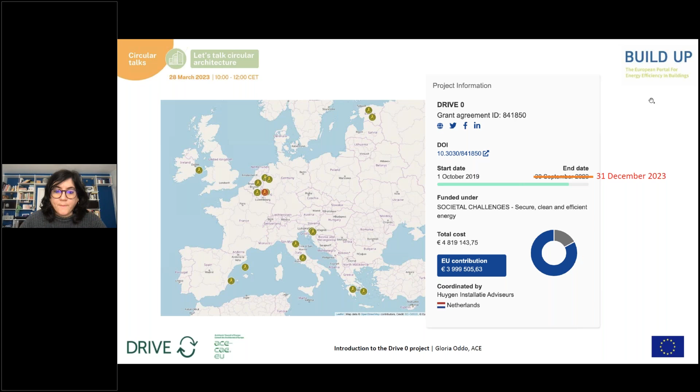The pilot countries of the Drive Zero project are 7, and we're going to see them later on. So the important thing is that for each country, there is at least one research partner, meaning a university or research institute, and at least one technical partner dealing with the technology innovation aspects.

Besides those 7 countries, we have also Belgium, because 3 umbrella organizations are based there, although we represent the interest of our members at European scale. So the umbrella organizations are us, the Architects Council of Europe, representing architects, UIPI representing property owners, and Housing Europe representing social housing providers.

Why is a circular approach needed in architecture? Well, first of all, buildings are responsible for 40% of the total energy consumption in Europe. So it's quite a lot considering all the other sectors that are also energy consuming.

60% of the energy used throughout the life cycle of the building is the so-called embodied energy, meaning it's the hidden energy needed to manufacture an object or a building. So from the mining of material, considering also the manufacturing and the transportation to the construction site. Then we have the life cycle of the building, and then demolition or hopefully reconstruction. So this is all the embodied energy.

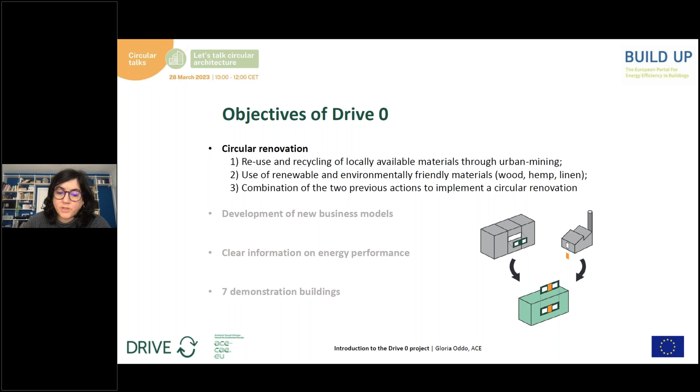Development of new business models - this we're going to see later on more in detail with my colleague, Professor Elettra Agliardi from the University of Bologna.

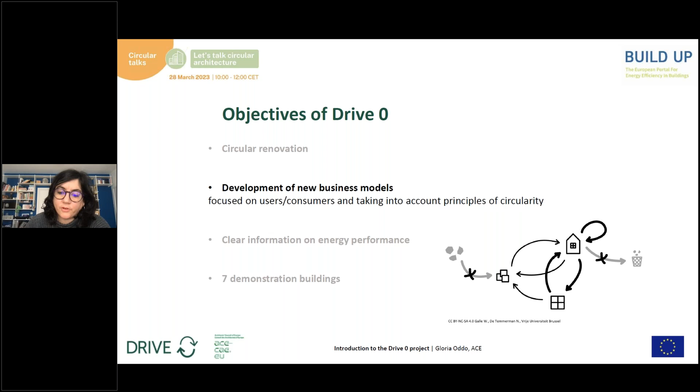Clear information on energy performance, because once the circular renovation has taken place, then of course we need to transmit this information to the users, to the occupants of the building themselves.

And then, of course, the buildings are also an objective of the project, and so they are all located in the 7 pilot countries of Drive Zero: Estonia, Greece, Ireland, Italy, the Netherlands, Slovenia, and Spain.

This is what the buildings look like before the renovation. As a consortium, we tried to pick buildings that represent a frequent typology in their own country. This was meant also to ensure replicability of the technologies and of the research that has been conducted in Drive Zero.

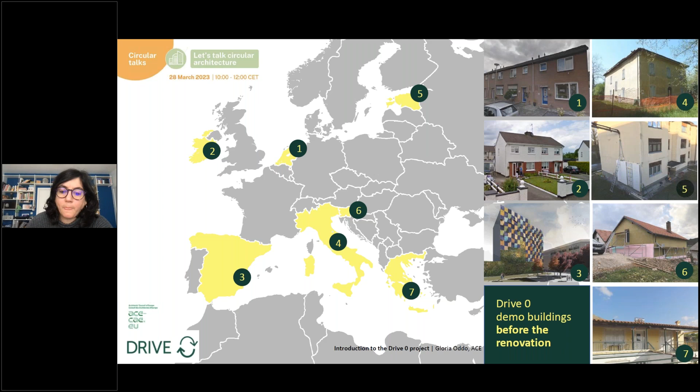Today's focus will be on Ireland, which is number 2, and Italy. Spoiler alert: this is how it looks already after the renovation. My colleagues will explain to you in more detail the renovation process.

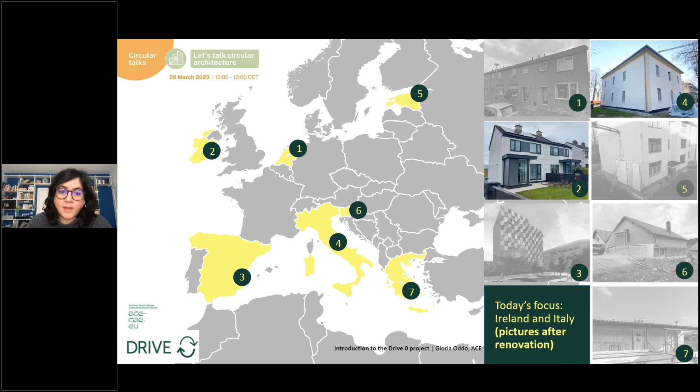What about the other demos? They will be presenting in the next webinars. As Julia said, this is the first of three webinars. The next one will be co-organized by University of Bologna and Housing Europe, addressed to social housing providers, though everyone is welcome to join. We're going to present the Dutch and the Estonian buildings.

More information will be available soon, but you can check our website on Drive Zero. The third and last webinar of this series is co-organized by University of Bologna again, and the Property Owners Association. This will be on the 27th of April, where we're going to present the Spanish, Slovenian, and Greek demonstration buildings.

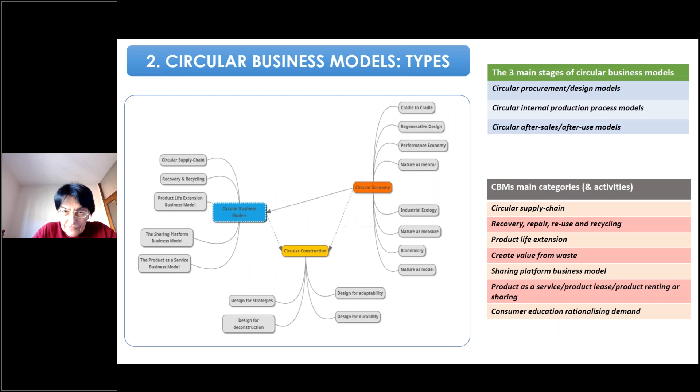As I just said, once we focus in particular on product and service, in terms of eco-design for customers, we always have to bear in mind that we need to implement environmentally friendly solutions.

You have to avoid planned obsolescence by design. So here you have these concepts which would be developed also in the next presentation: design for disassembly, modularity, and industrialized manufacturing.

At the same time, you have to think in the design phase of ways to facilitate repair during use, facilitating product upgrades and updates, facilitating recycling after use. So here you have to focus on the end of life recovery as well. But at the same time, we have to move also to different ways of considering, from the point of view of consumers, the financing aspect and therefore the payment aspect.

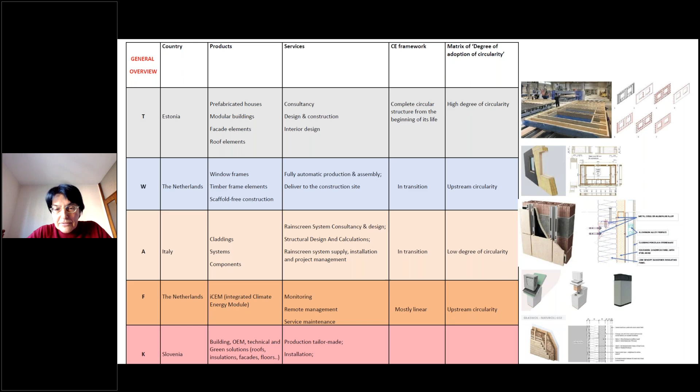Here you have an idea of the type of products delivered by these companies. To conclude this preliminary part, the main takeaways relevant for most of the audience, architects or consultants in the eco-design process, is this: you have to become aware in the design phase and develop solutions that take into account how to introduce circular inputs, circular product service systems, and exploit other important elements of circularity like lifetime extension and sharing platforms. Also consider products where value recovery is important, how to reuse waste, and how to build new solutions in terms of shared ownership, considering use aspects rather than ownership.

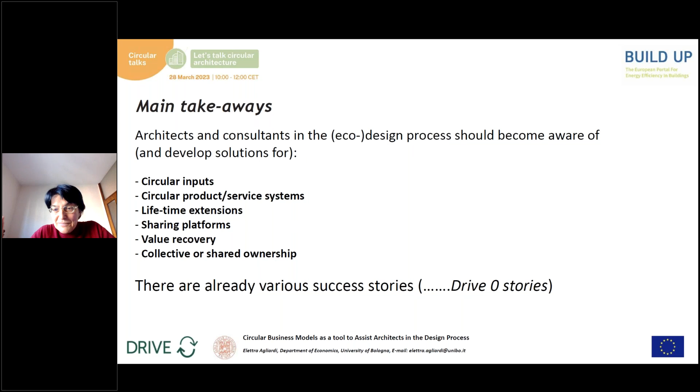There are already various success stories, and of course we have successful stories also within Drive Zero. The Drive Zero successful stories will come immediately after my presentation. Thank you for your attention.

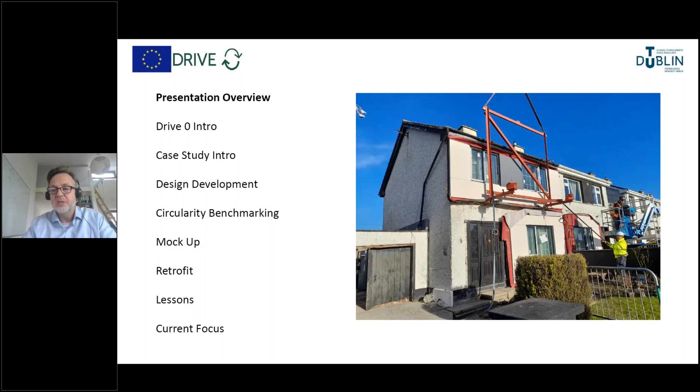I'll quickly skip through the Drive Zero intro since you've already been introduced to the project. I'll talk about the Irish case study, the design development, how circularity was benchmarked, the mock-up phase where we did preliminary testing of the circular wall panels, and then go through the actual retrofit phase, finishing with a discussion of lessons learned from the project.

As you know, Drive Zero is an EU project looking at exploring circularity through modularized solutions as a core aspect. We are one of 7 consortium partners, the Irish partner on the western fringe of Europe.

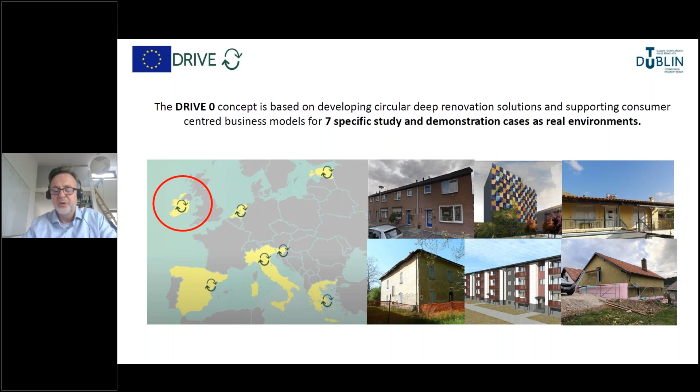Our case study is in the center of Ireland. It's a 1970s construction, typical of what we call a semi-detached house, 3 bedrooms, in social housing owned by the local authority, or what you might call a municipality in Central Europe.

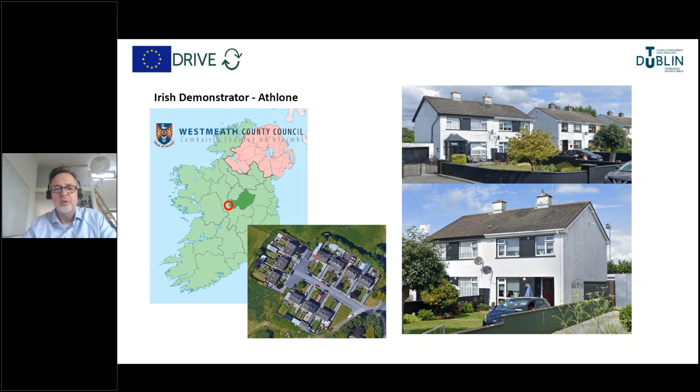So this is the demonstrator. This is our energy rating method, and when originally constructed in the 1970s, it would have rated as a G, the lowest rating. It would have been heated with a solid fuel range cooker and an open fire, and was uninsulated.

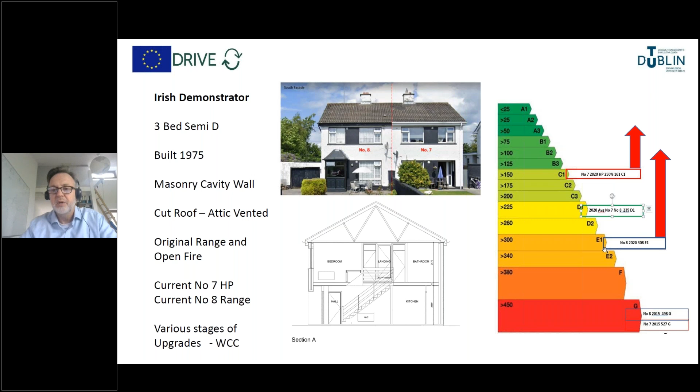In the interim between the 1970s and now, before we started, there were some interventions. One property rated at an E1, with double glazing installed and some insulation in the attic. Another property rated at a C1, which had similar upgrades plus a modern heat pump fitted. So the houses were already partially retrofit, and we attempted to achieve a combined 65% improvement for both properties.

The measures we undertook were a fabric upgrade, including the modularized system and a small extension. We input new heating systems, new energy efficient ventilation systems, renewable energy through photovoltaics, and new windows and doors. All of that combined gave us a 65% uplift.

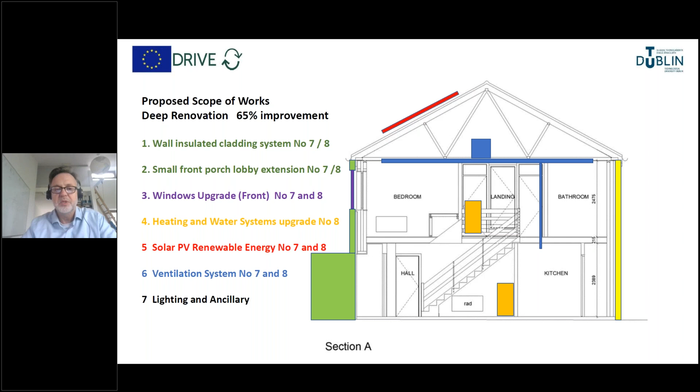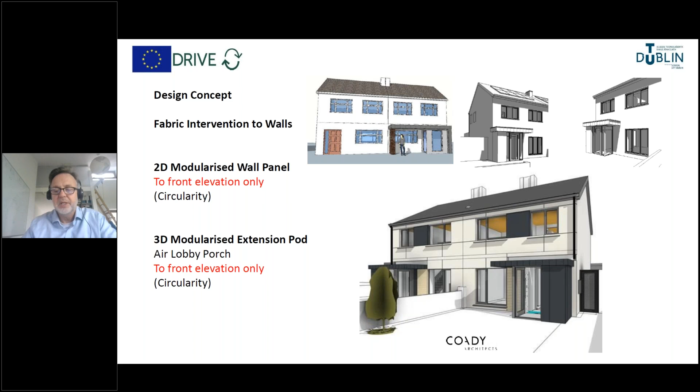Design concepts really focused on how we would retrofit the facade, the wall facade. Due to the scale of the project and budget, we didn't feel it was feasible to do the roof, which had already been partially upgraded. So the main intervention in the demonstration project was the modularized wall construction and the modularized circular extension pod.

So our partner was a conventional light gauge steel manufacturer. They had a system being used in construction in Ireland, and we looked at how we could adapt this system to become a wall cladding and modularized extension system, transitioning some of the plastic insulations to bio-based insulations, and looking at how we would connect and assemble the panels to the wall. These are some very early concept proposals and an initial concept build-up for the panel.

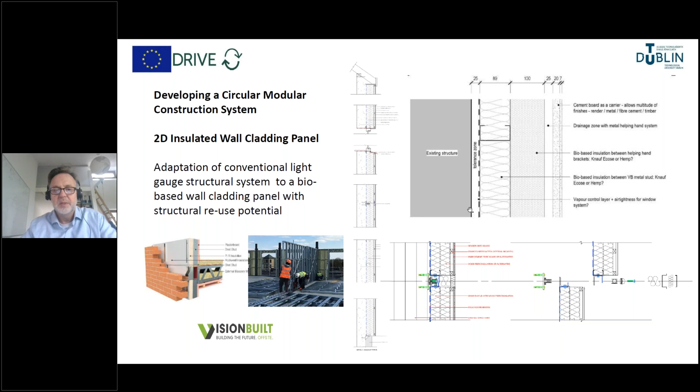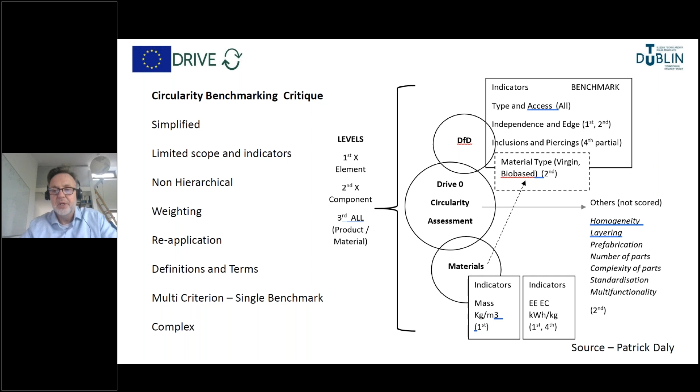There were a number of circularity assessments done during the project, which were quite insightful and helped us develop the strategy. We also developed some criticisms of the simplification of that method, particularly that it wasn't always undertaken at different levels in the hierarchy. But it really helped us develop our thinking about what circularity was, and in particular how important design for disassembly and material specification are to achieving circularity at construction level.

Out of that, we focused on this strategy to attempt full disassembly at all three levels in the building construction hierarchy. At level 1, we wanted to ensure the prefabricated panels could be detached from the host walls in their entirety, so they could be reused in another cladding or structural context because they had structural capability, or transported to a facility to be disassembled in a structured environment.

At level 2, we wanted to ensure the main components that made up the system - the wall panel, the window system, and the jointing panels or jointing sections - could all disconnect from each other and be reutilized with minimal impact. Then at level 3, we wanted the panel system to be fully disassembled from all components and products and materials down to their base elements.

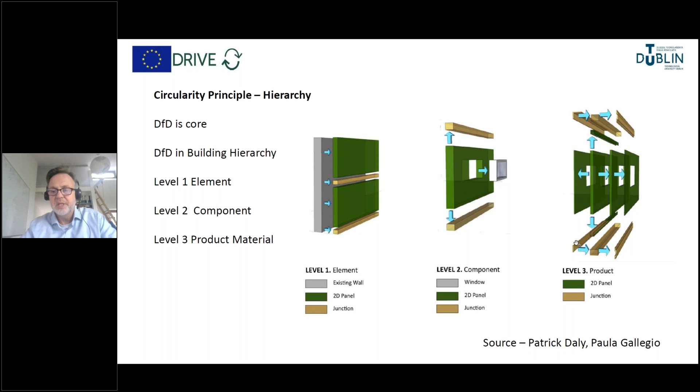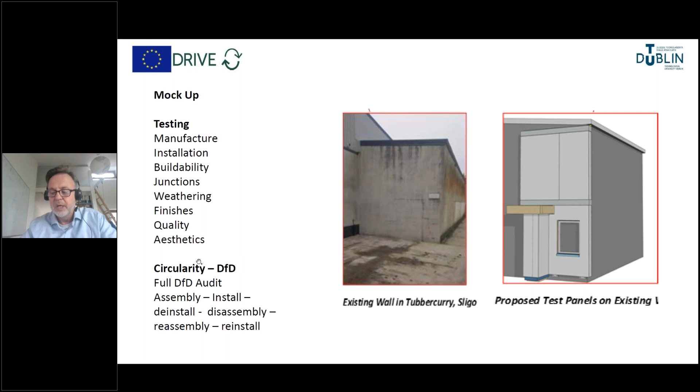Based on that strategy, we tried to implement that concept in a mock-up, and this is the mock-up design. It was partly testing architectural and technical factors, but we also undertook a full design for disassembly audit - not only installing the panels, but taking some down and disaggregating them, then reassembling and reinstalling them. We went through the entire disassembly and reassembly process in the mock-up.

The design of the mock-up was based on trying to make sure we were covering all the types of junctions we may encounter in the retrofit, and quite advanced technical details were done on our first attempt.

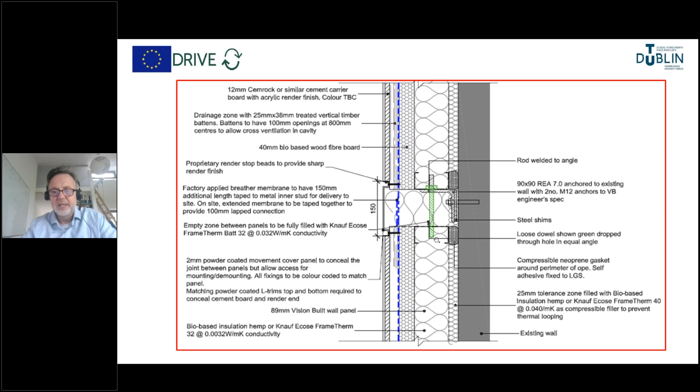Central to that was the concept of having an access zone that we could get into and access a simplified fixing method, so the panels could be lifted up and off their brackets. The panels technically have no direct fixings - they're held in place by gravity and restrained anchorage. This was to allow a very simple and rapid install, but also to facilitate a simple and rapid deinstallation. So that was a key detail.

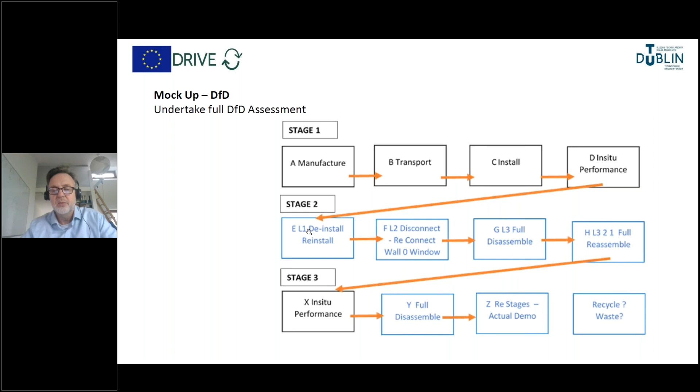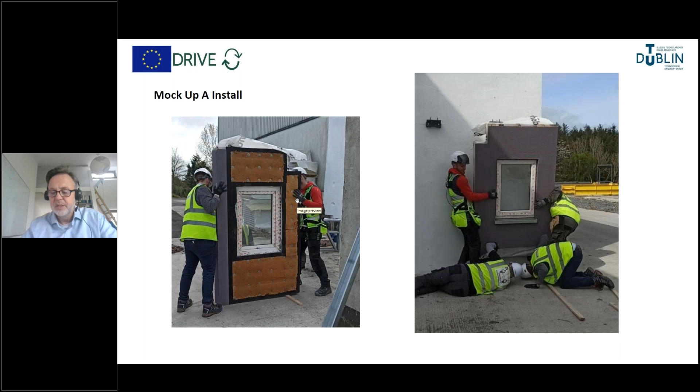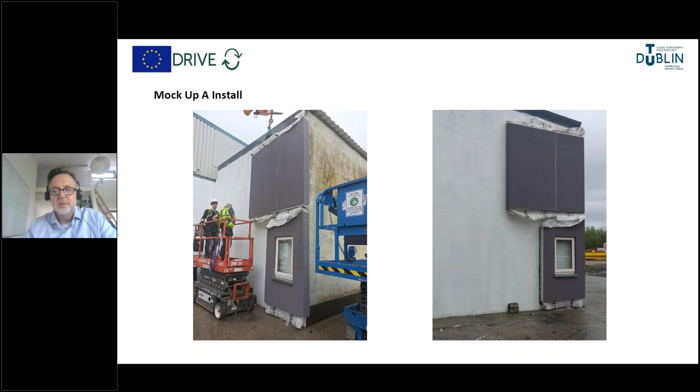So there's the panels being manufactured, and there's the bracketry being prepared, and then the panels going in place with a backing concept, which we then modified. The backing detail was to take into account undulations in the existing wall construction, and the three panels going in, and then we had the roof and wall panel for the pod to go in.

There were significant learnings from that, and the main one was that we needed more tolerance in the bracketry system to facilitate easier install, but also more accurate jointing and alignment of panels. We were also critical of the render system we were using and really saw the need to move to a completely dry system. The backing solution was also not working effectively, so we modified those.

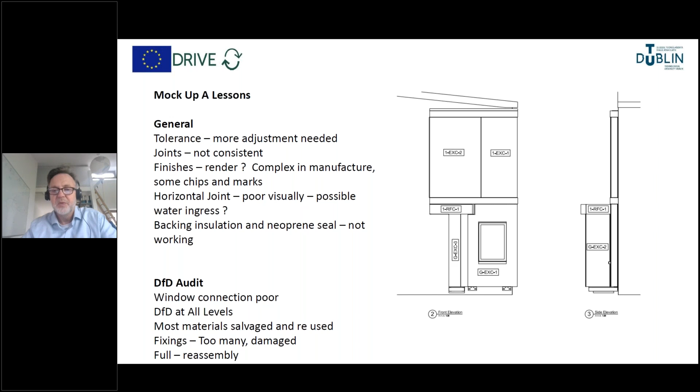We then began to take some of those panels down and undertake our full design for disassembly audit. We disassembled and remanufactured some of the components. A significant change was redesigning the bracketry, drawing from our colleagues in Estonia who had done a similar bracket system in the More Connect project. We introduced that concept to give us more tolerance in the design, and we changed to a full dry system.

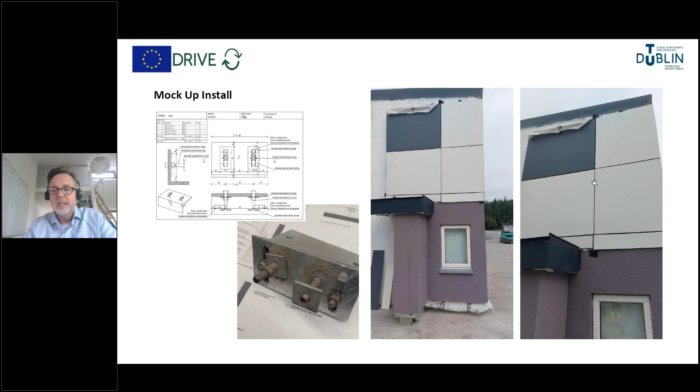Here you can see the roofing panel and the wall panels for the extension pod being mocked up. Even from this, there were some improvements to be made with how we were going to make the jointing more weather tight, but that was the fundamental change.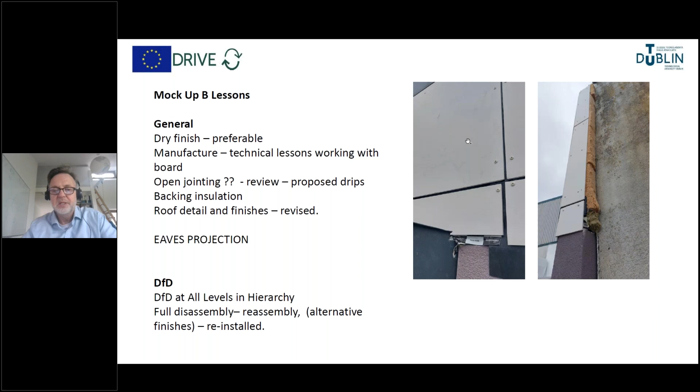From that, we did some further adaptations and a third installation to look at the process of installing a larger panel system. The mock-up was quite an essential process, and there was huge learning from that. We then began to apply that in the final design.

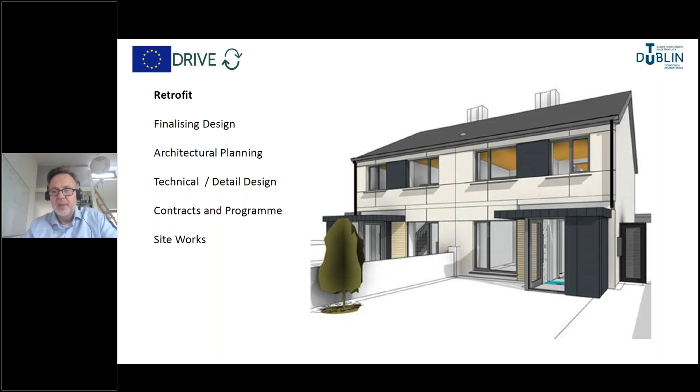The final design was developing the architectural design with a change in materials and discussing issues around planning. This was one of the concepts developed for that discussion. We also advanced the technical and detailed design with specification and detailing changes made from the mock-up, developing building contracts and program, then moving into site works.

We have some examples here from the final architectural drawings from the design, and then we move to site works. I'm going to go through the enabling works and then focus on the upgrade of the facade on the modular system.

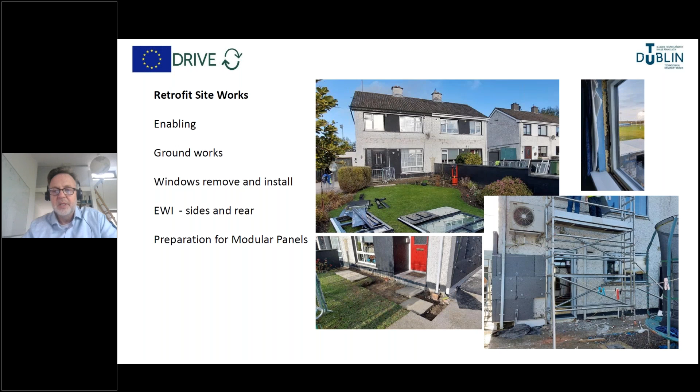Firstly, we have some enabling works. The modularized facade has only been applied to the front of the properties, while the rest of the building is being wrapped in external wall insulation. Here the building is being prepared as the windows are being removed from the rear, and the bracketry is going in for the panels.

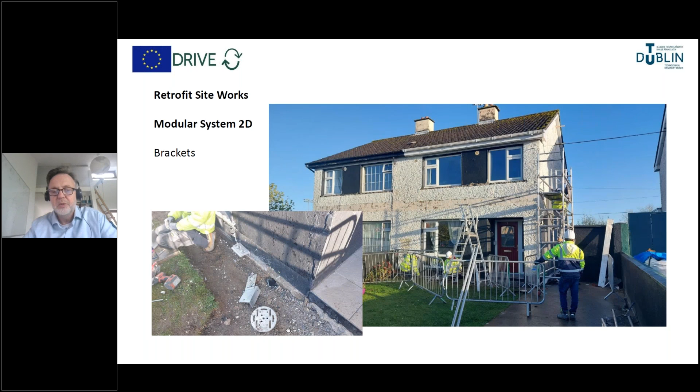We have some ground screws going in to take the extension so that we could avoid concrete foundations. There's the brackets now being lined up and installed.

Then we have the delivery of the first panels and the crane, with part of the road having to be blocked off to facilitate the delivery and the craneage.

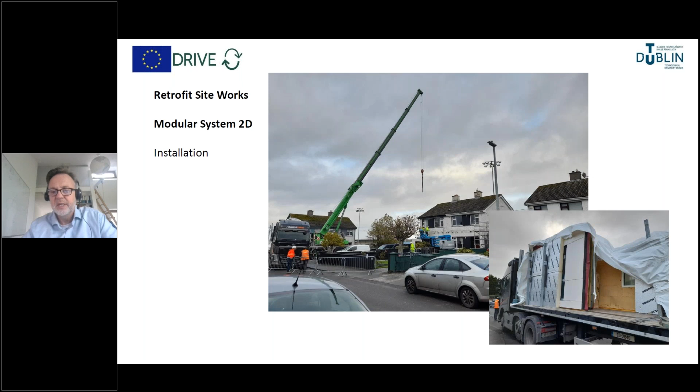There's the first panel being lifted off and dropped onto the brackets, being leveled up and going into place. You can see it being dropped in, and the brackets on the right show how it sits onto them. It's then restrained from the top bracket, with a clip put in to restrain it in place.

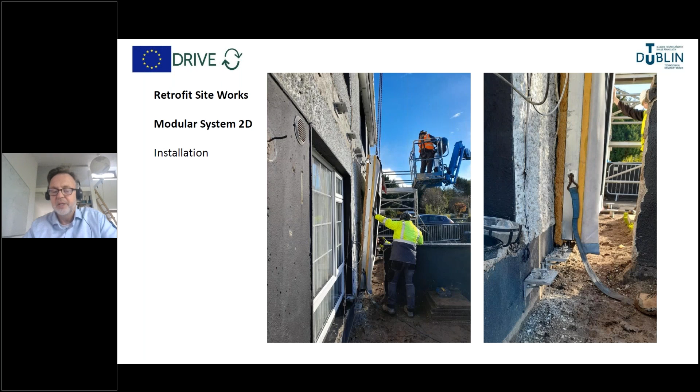That's the first panel installed, sitting on the adjustable brackets. You can see the brackets can go up and down and can go in the horizontal plane in and out to give some tolerance.

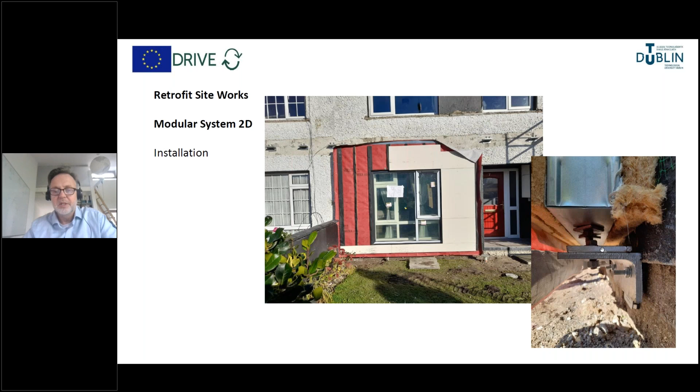Second panel going in, fully finished, windows installed. Upper panels going in — these had to go in under an eaves projection, so a counterbalance system was designed so they could be put in vertically and get in under the projection.

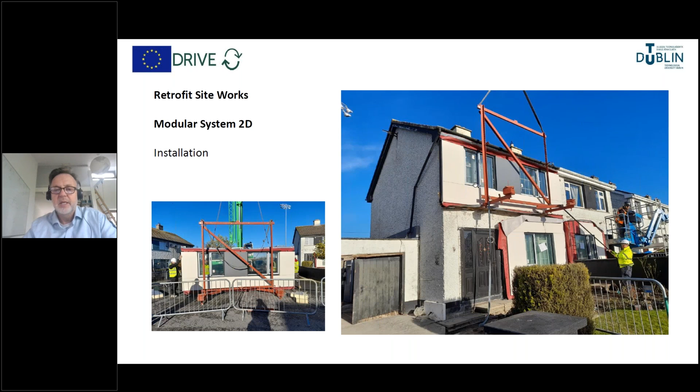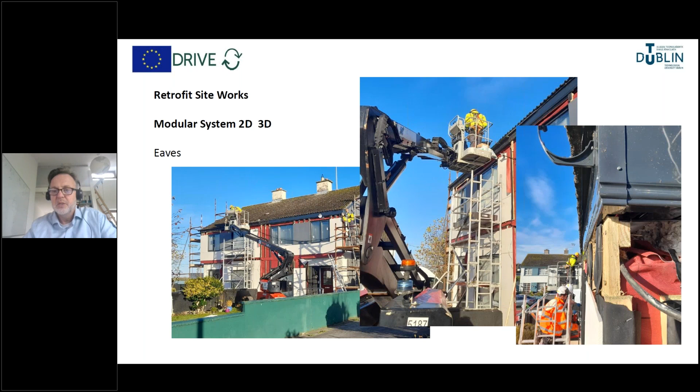Then we are doing some modifications to the eaves to get ventilation into the roof, because the panels were affecting the original airflow into the roof.

Then the internal windows are removed, showing the new external windows already in place, and they need to be lined out, insulated and made airtight.

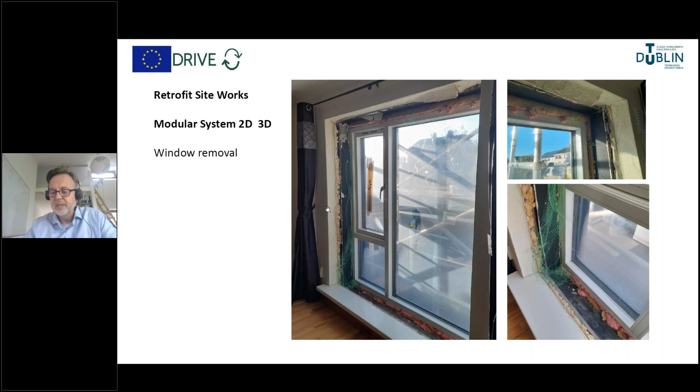Then the porch floor is going on top of the ground screws, with the wall panels going in for that.

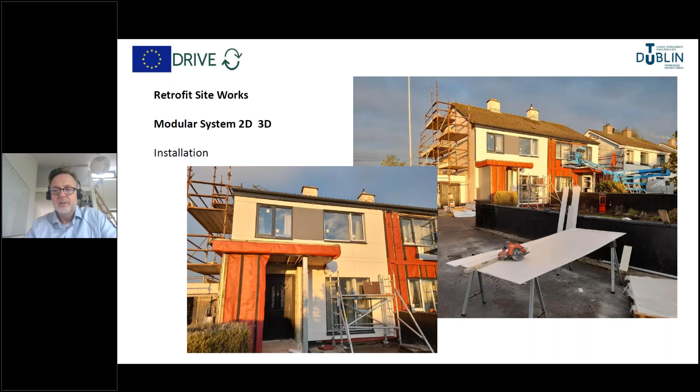Walls and roof going in on the extension, the roofing finish on the extension, and wrapping the external modularized system detailed to meet the external wall insulation system. Then the porch glazing comes with doors and glazing for the extension and internal finishing.

Of course, all that's happening on the outside, but there was reasonable impact internally, particularly as all the windows and doors had to be relined. So there was impact in every room, and there was some disturbance to the tenants.

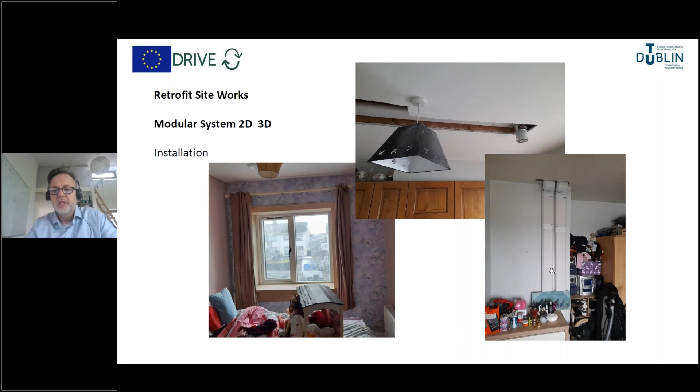We were also installing new ventilation systems, and those routes needed to be worked within the existing fabric. That meant some interference in a number of rooms, which was a challenge for the tenants.

Then we're coming to finish out the modular system, and the external render system is being finished as well.

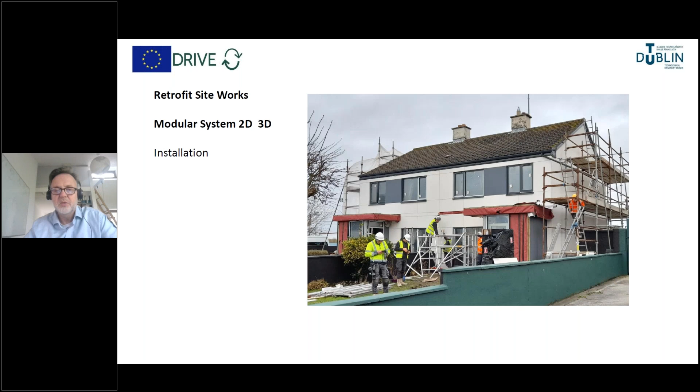We're coming toward completion then with the PV system being installed. Then we come to completion just a few weeks ago, with all the groundworks being finished outside and the roofing being finished on the modularized system.

The main lessons learned were in relation to the retrofit works. Obviously, it was quite unique because it was a research project, so the team involved was quite large and complex for such a small project. I think that had communication problems, because you would not normally have such a large team involved in a small retrofit project. We were surprised with the amount of impact on the tenants.

Although we had a lot of external plug and play modularized solutions, there were still significant impacts on the tenants who were in situ and living in the properties during the works. That was particularly access to the property because of the porch extension, all the windows having to be lined out, so every room that had windows and doors had some work and tradesmen. The scaffold for the external wall insulation caused access issues to the rear of the buildings, and some of the services installations meant electrical cabling and vents and ductwork being installed, which also had impacts.

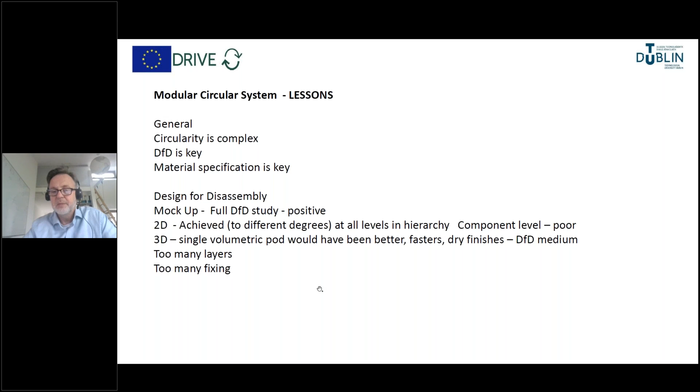Going forward then, we would feel that for the Drive Zero project, we probably needed a more comprehensive and diverse partner team at the beginning. So we would look to do it again with a wider team base, and a more significant budget and a more advanced circularity system assessment method.

Going forward, we would love to be involved in follow-on research on circularity, particularly in design for disassembly and modularity. We see that there's huge opportunity for developing modularized circular solutions for the upgrade of facades and building envelopes. We would like to be involved and see the need for a larger scale demonstration project where we can see some of the financial benefits of scale and more holistic whole building upgrade rather than just partial, both domestic and commercial. We would think that we would need contractors and specialist suppliers engaged in the project from the start, because it's also about a circular process, and circularity needs to be in the whole supply chain.

So there are some of the overarching lessons that we've drawn out from the project. Thank you very much, and hope that's been informative.

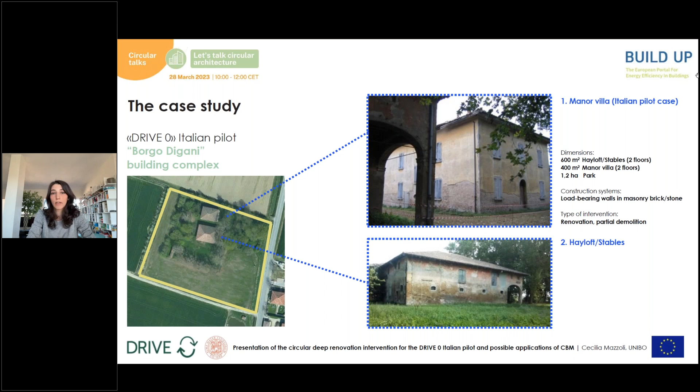In 2021, when the private foundation decided to intervene in the building complex, it was very compromised and damaged in terms of seismic safety, architectural and conservative quality, and also energy and mechanical performances. So the manor villa is constituted of a load-bearing masonry structure in solid bricks, and we can say that it represents a very typical rural residence, commonly widespread in different rural contexts of Southern Europe and Italy.

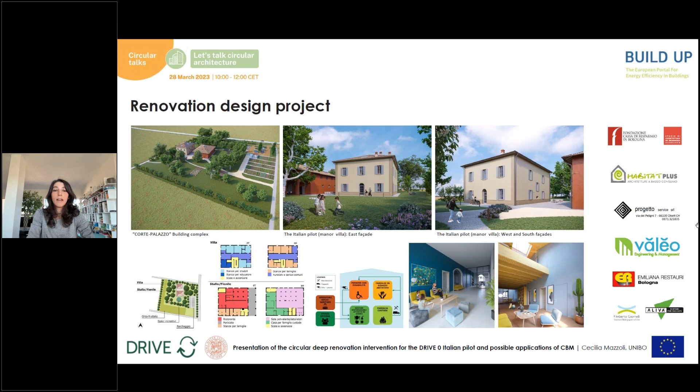At the end of the renovation process, the municipality of Argelato will dispose of a renovated building complex in which the manor villa will be transformed into a multi-user social residence for disadvantaged and disabled people, and the former barn stable will host social services for residents and citizens, surrounded by a beautiful park of great landscape value.

The buildings are not subjected to an architectural constraint, but just to a historical documentary constraint. So the regulations in force in Italy do not allow deep intervention in the facades, but just on the roof. On the facades and other architectural elements, it is only possible to softly intervene. However, it is always mandatory to realize interventions that preserve the typological construction character of the buildings as a testimony documentary building.

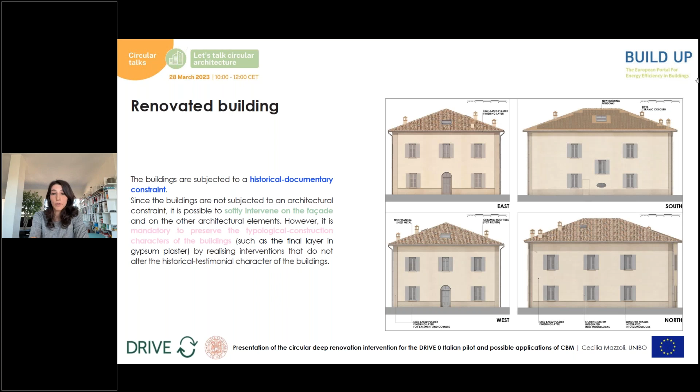This issue represents a very important boundary condition to be considered for the design of all the renovation processes to be developed. The construction began in July 2021, and the end of the works is scheduled for mid-2023.

In these slides, we can see the specific circular actions implemented. First of all, we have the reuse of existing materials, such as 92% of the original roof ceramic tiles on the new roof, and also the reuse of crushed original solid bricks for paving substrates. Then we have the installation of building integrated photovoltaics panels integrated in the south-oriented pitch of the roof, and the energy refurbishment of facades.

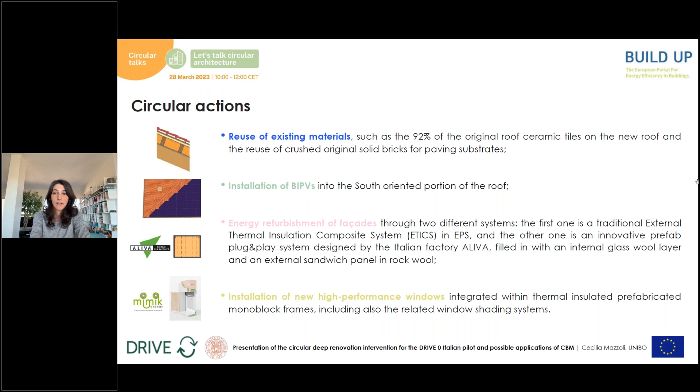That is one of the main important interventions, through two different systems, one traditional and the other more innovative, designed by the Italian factory Aliva, which is partner of the Drive Zero consortium. And last but not least, the installation of new high-performance windows integrated within thermal insulated prefabricated monoblock frames, which also include the related window shading system. So these are basically the most important actions.

Regarding the refurbishment of the building envelope, here we can see the two different systems adopted. For the south and east-oriented facades, we used a traditional external thermal insulation composite system called ETICS in EPS. This was implemented, fixed and glued to the existing facade for a total thickness of 20 centimeters.

On the north and west-oriented facades, an innovative technology designed by Aliva has been implemented. It consists of plug-and-play prefab panels filled in with an internal glass wool layer and an external sandwich panel in rock wool, for a total thickness of 20 centimeters, equal to that of the ETICS used for the other facades. The implementation of two different solutions allowing the same value of thermal transmittance according to the legislation in force is aimed at testing the technical feasibility and energy performance of the two solutions.

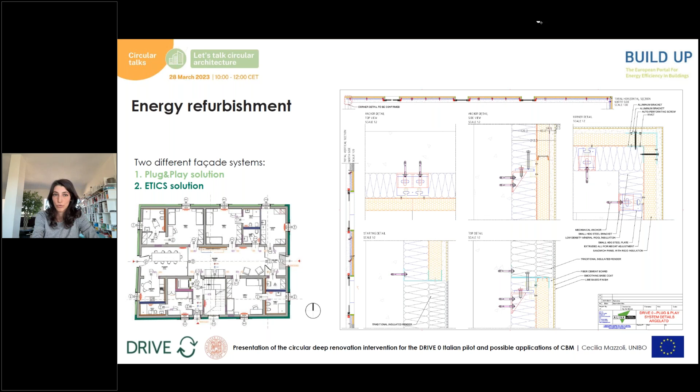Here we can see the specific materials and products used for the plug-and-play solution. For the external finishing, we used a fiber cement board that was used as a waterproof layer and as a base for the finishing layer in lime plaster, imposed by the historical constraint.

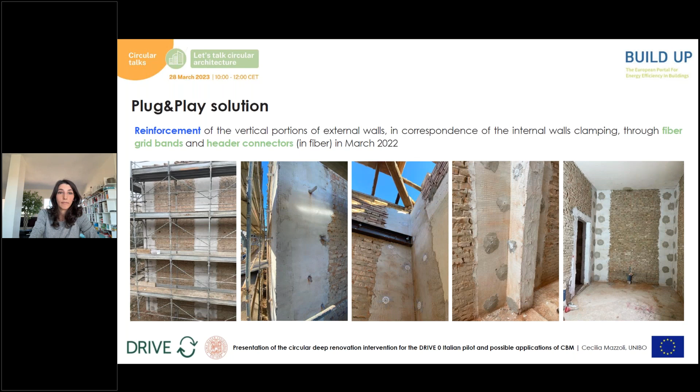Here we can see some pictures of the deep structural reinforcement of the external load-bearing walls through the use of fiber grid bands and header connectors. And here, after the masonry reinforcement, we see the installation of metal anchors for the implementation of the prefab components.

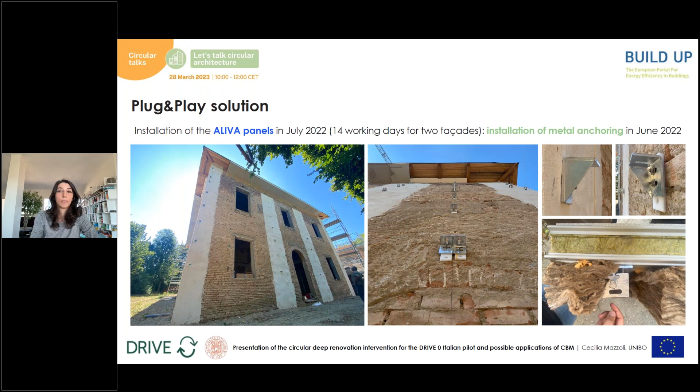Then we had the implementation of these large format panels designed and produced by Aliva, which is completely innovative in the field of protected heritage. So this was the most important challenge for our pilot demonstrators. The installation took 14 working days for the two facades, so we can say that it has been proven to be a very fast assembly system.

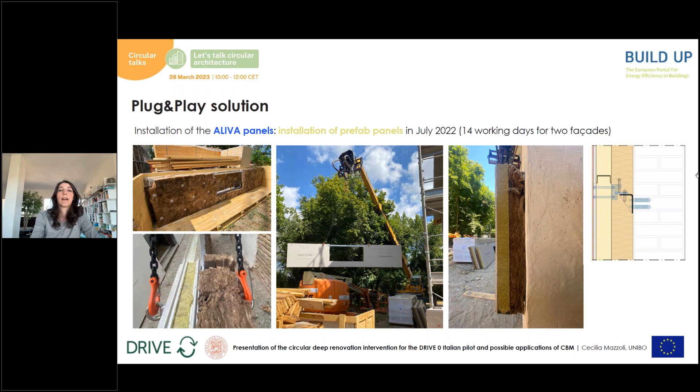In correspondence of windows, the prefab monoblocks were positioned and fixed through the use of punctual anchors in steel. Then the voids have been filled with EPS in order to solve the thermal bridge.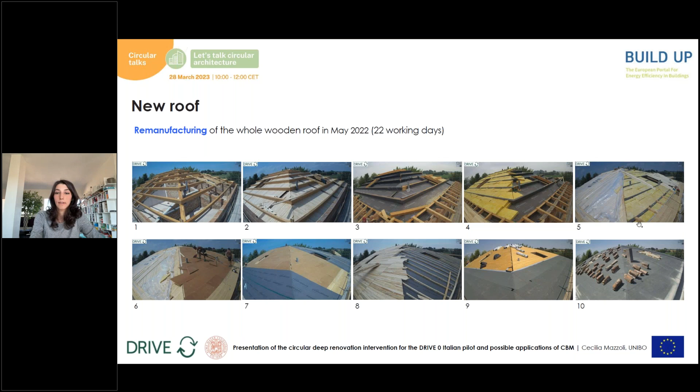And then in particular, we can see the two specific circular actions implemented for it, related to the reuse of the original ceramic roof tiles, 92%, and the installation of building integrated photovoltaics panels in the south-oriented pitch of the roof.

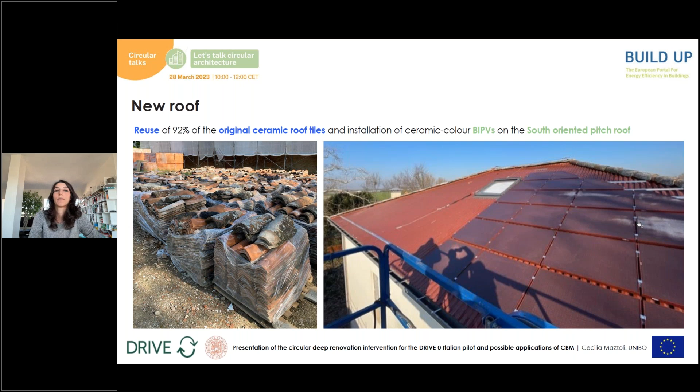Regarding the analysis, Unibo conducted several analyses of the circularity level of the intervention for the 4 different facade solutions. We considered the plug and play and the ETICS solutions in the demo version, the ones physically adopted in the demonstrators, and then we studied also the corresponding solutions in the original version.

That was more circular finally. The analysis considered different values related to different factors: basically the embodied energy and embodied carbon values, the circularity indicators such as design for disassembly, materials origin, and the reusability of products and components used in the different solutions, and also the percentage of waste and reusable materials at the end of life.

Among the 2 plug-and-play solutions, the original one, including metallic substructure and anchors and a cladding in recyclable ceramic tiles, seems to be more circular than the other one imposed by the historical documentary constraint with its non-recyclable original lime plaster finishing layer.

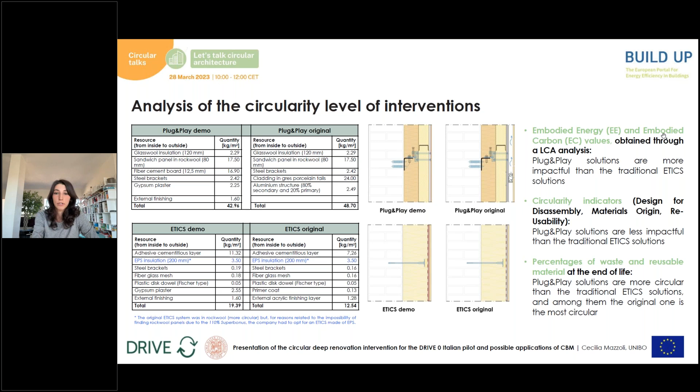Referring to the business model circularity, as shown during the presentation of my colleague Professor Agliardi, we can see in particular the Aliva solution. This solution could be considered from 2 different points of view. We can say that this system presents a medium-high degree of circularity in relation to the technical construction issues, especially for the plug-and-play original solution that is totally dry assembly and so very reversible and effectively conceived according to the principle of design for disassembly.

But we can say that this system presents a low level of circularity in relation to the more logistics management and organizational issues, as assessed by Aliva itself, which defined this process still in transition for the company. So this was the analysis we conducted.

In conclusion, these are the main lessons learned from this experience. We can say, first of all, based on all the analysis conducted, it is possible to definitely assess that the plug-and-play systems are more circular in general than the traditional ETICS systems.

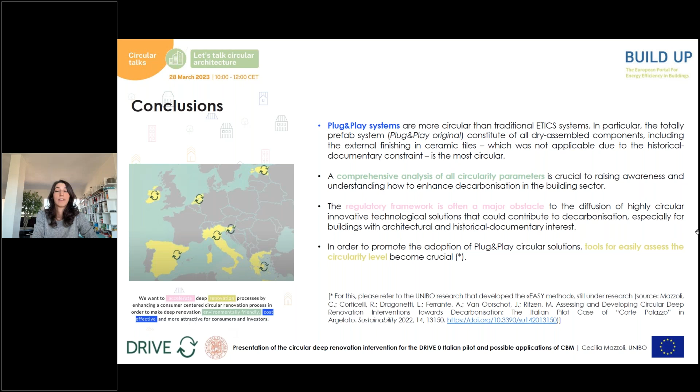Regarding this point, Unibo and the other Drive Zero partners are working on developing tools and methods with the same goal. So we are working on this. And that's all for me. Thank you very much for your attention.

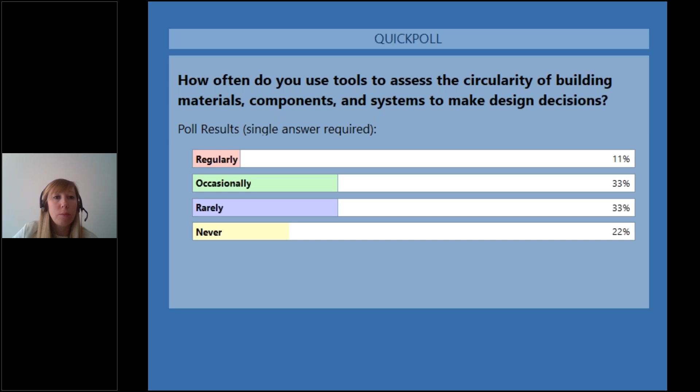Another question. How often do you design with secondary, reused, or recycled construction products in your projects? Select one: regularly, occasionally, rarely, or never.

Let's see the answers. Okay, most of you never, 36% rarely, 18 occasionally. So it's not widely, they are not widely used.

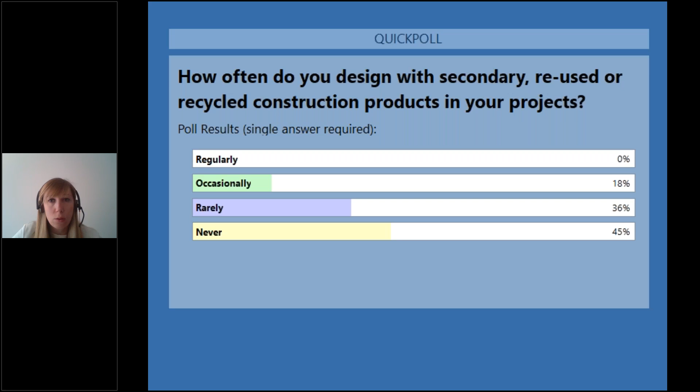Another question. How often does your design process take into account the deconstruction factors? Select one: regularly, occasionally, rarely, or never.

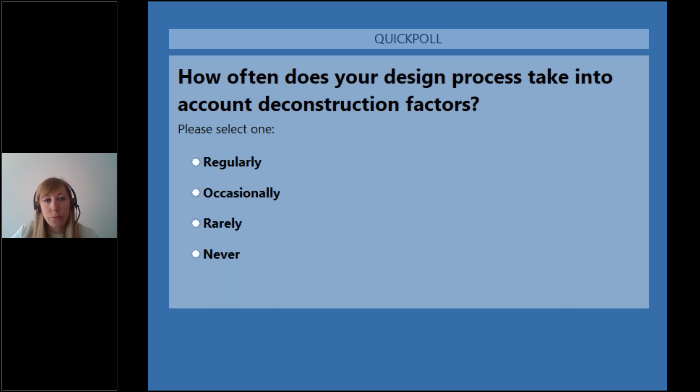Let's see the results. So 38% rarely, 25% regularly, on the other side never 25%, occasionally 13.

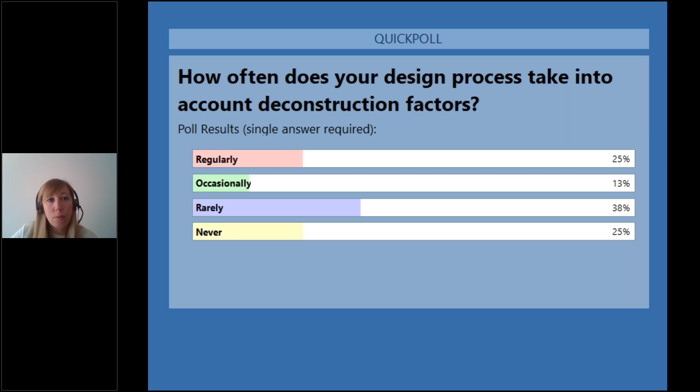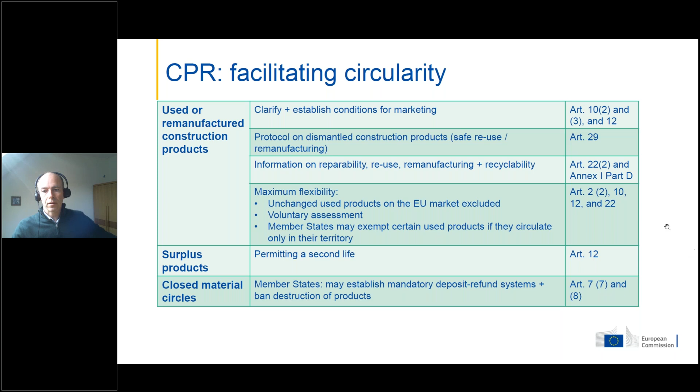Go to the next one. We have a study that's ongoing, finishing in a couple of months' time. This study is trying to understand better what the industry is doing when it comes to circular approaches. At the moment we have certain statistics on things like waste—a Eurostat statistic on waste—but they don't really tell us in detail what the industry is doing. So this study is specifically trying to develop indicators that companies, especially SMEs, would be capable of reporting against on their own activity.

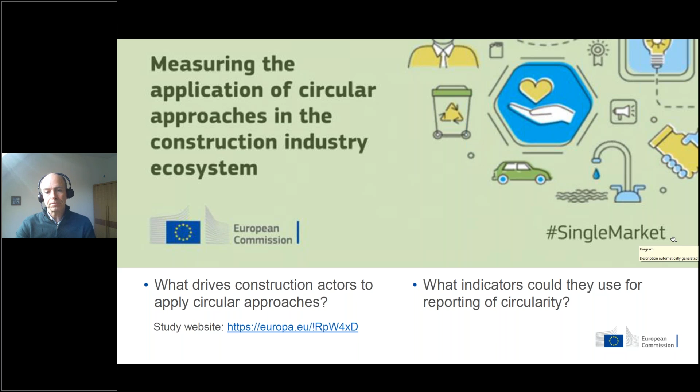We also have a new large study, or preparatory action, on the analysis of greenhouse gas emissions and carbon removals related to the whole EU building stock. This project is going to run until 2025, and it's going to get us unprecedented levels of data and information on the whole life cycle emissions of construction, and look at the trajectories each member state could take, the strategies they could adopt on a large scale to meet climate neutrality in the construction and building sector. That one doesn't yet have a website, but the work has started recently.

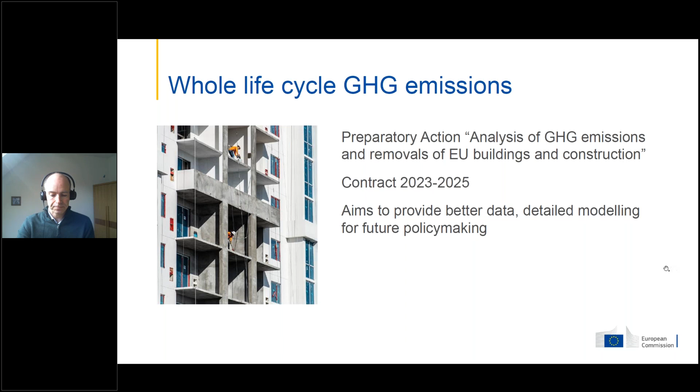We can also look forward to the taxonomy criteria that are expected to come out later this year. We already have in place in the taxonomy. For those of you who don't know, the taxonomy is the common language for green investments. So when financial institutions want to label investment products as sustainable, we're looking to create a common language across the European Union of what this means, so that everybody's using the same definition.

We also have a new study that has just started recently on end of waste criteria for construction and demolition waste. This is the legal definition of when waste stops being called waste and starts being called a secondary material. End of waste criteria exist in certain member states at a national level, and at EU level we already have end of waste criteria for scrap metal and for glass.

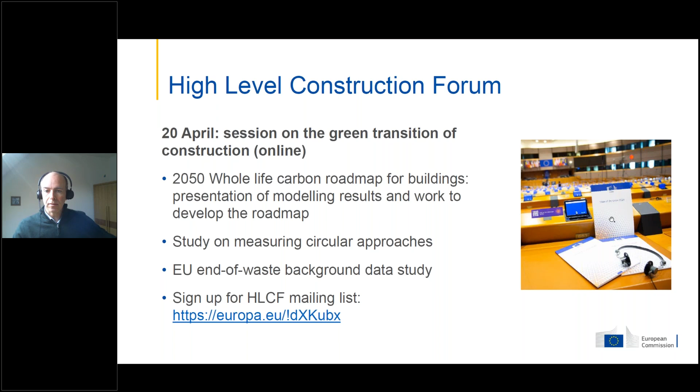We also have, for a few years now, the guidance document, the Construction and Demolition Waste Management Protocol. This is quite well regarded, widely used and recommended, but it's getting a little bit old - it's from 2016. So we're looking to update it with a revision starting later this year, probably going into next year as well. We'll update the document to better take into account the renovation wave and also to mention more clearly things like asbestos, which is an issue that needs to be tackled in the building stock as well.

That was my last slide. I can point you to the link on our website, the DG Grow Construction Unit website, where you can see more information on everything I spoke about, and I'll be glad to take any questions, or I'll listen later on as well from the rest of the event.